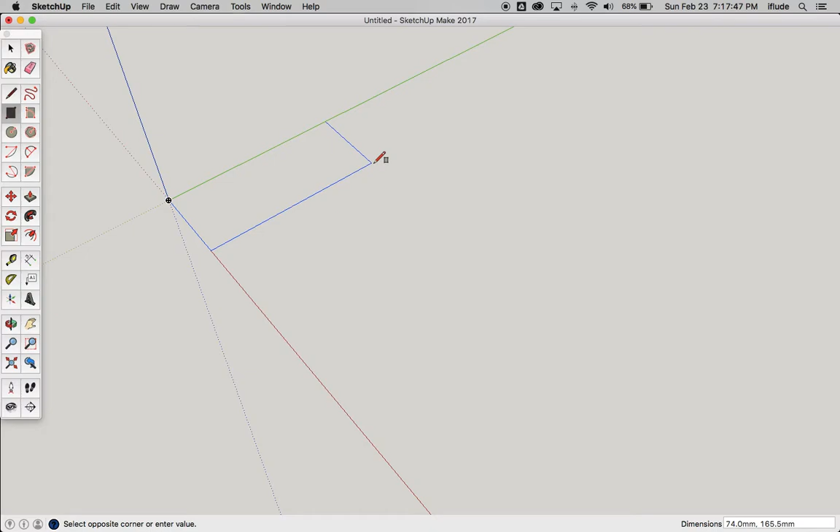So let's first do our rectangle, 700 by 1000. That can be our starting point. So 700, 1000, and now I need to zoom out a little bit so you can see what that looks like. Okay good, so let's go back.

Now you can see that from that same center point, level with this, you've got a dimension of 500 going up, so I'm going to draw a guideline there. Also these two legs are both 200 wide, so I'll do another guideline just there. You know you can take a guideline from any existing line, so just drag up from here, type 500, and I need one in 200 from here, and in 200 from here.

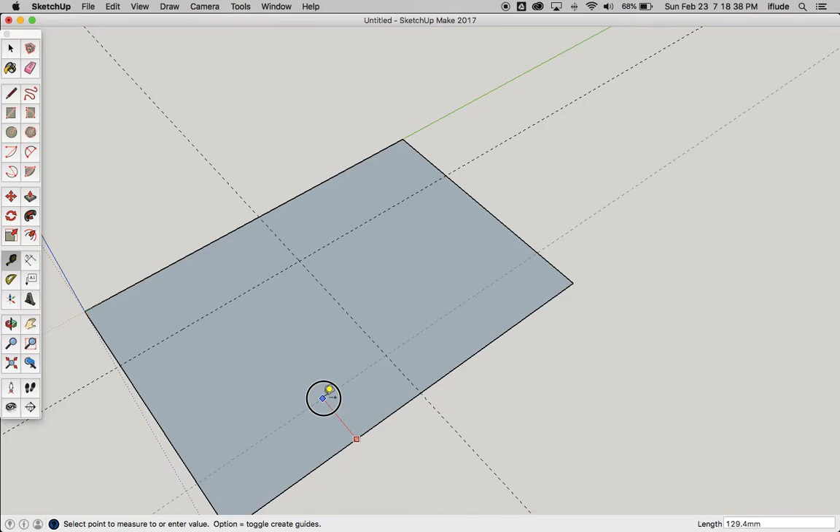Now what I'm doing here is building the basic shape before I add any radiuses. So what I can do is use my pencil tool to draw lines in using the guidelines as my guide.

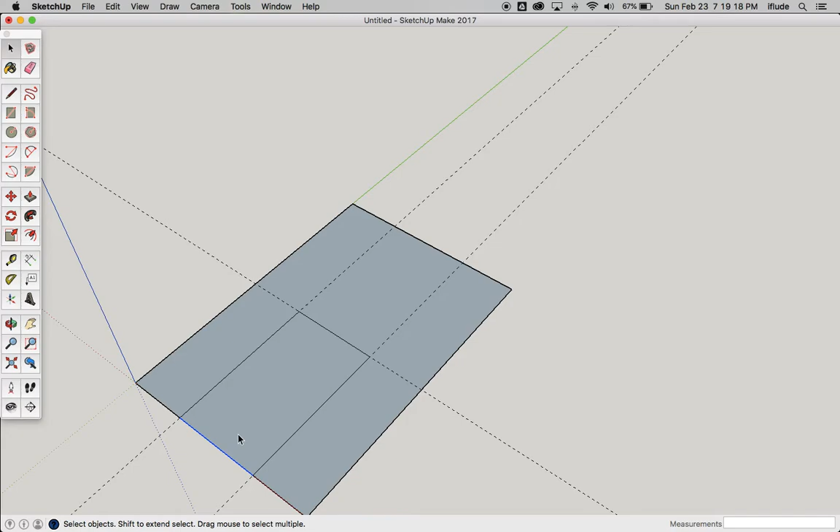If I've done that correctly, that should be two separate surfaces. A surface only occurs when you have a complete set of lines which join up in an enclosed shape. If I remove one of those lines, like deleting this line right here, the surface will also disappear. So if I hit delete, now I've selected that line, you can see I have the basic shape of what I need to draw in the booklet, except for the fact that I don't have any of these radiuses yet.

So let's start putting those in. Let's put radiuses of 300 on those corners.

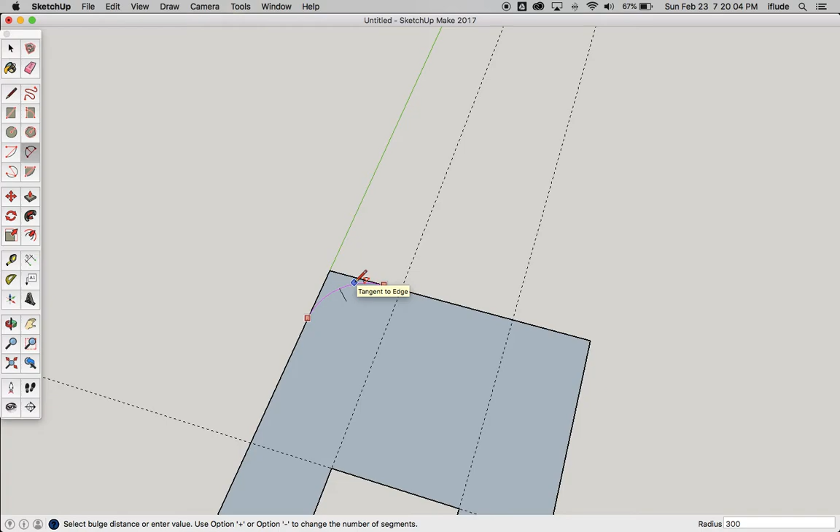2-point arc, click. Let's try that again. Get that to there, type 300. There's my first radius. I can go over here — I know that's the same, so I can just double click just here. There's my second radius.

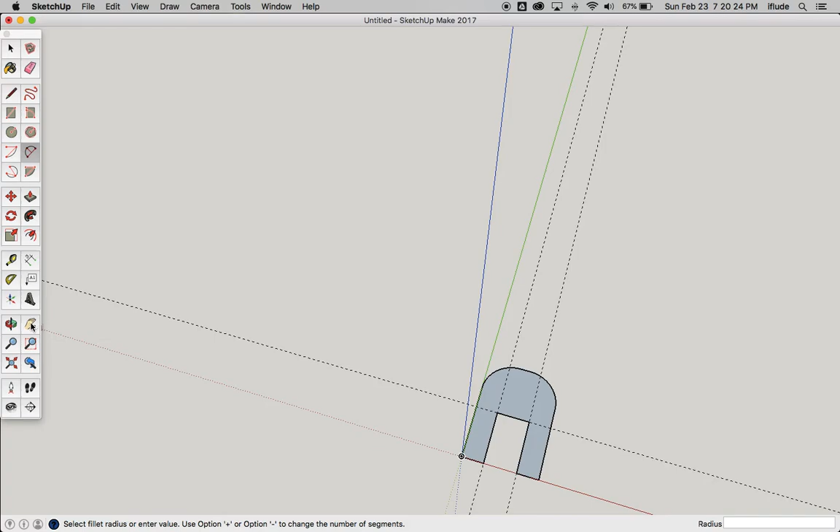And what else do I have? Now I have a radius of 100 on the ends of these feet, so I'll put that on now. Zoom in so we can work accurately, and move that view around a little bit.

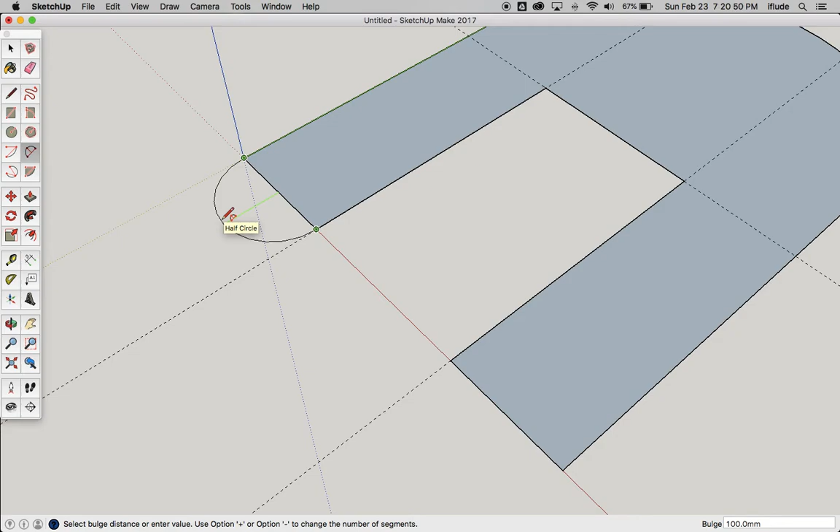Okay, so the 2-point arc actually has 3 points you have to define. So if you've watched any of the previous videos, you'll know that if I click twice and then drag out, at a certain point it snaps into place and becomes a half circle, and Sketchup conveniently tells me that it's a half circle. Now if I click, it gives me the half circle. Do the same thing over here.

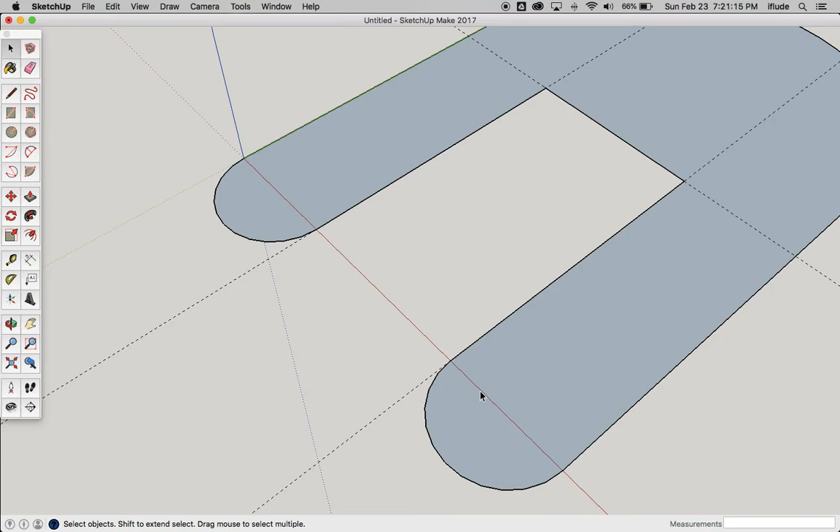And then in order to make it a complete shape, I need to remove these lines that divide my surface into two. Okay, so I'm now almost complete with my shape, except for the fact that I need to add some radiuses here on these inner corners.

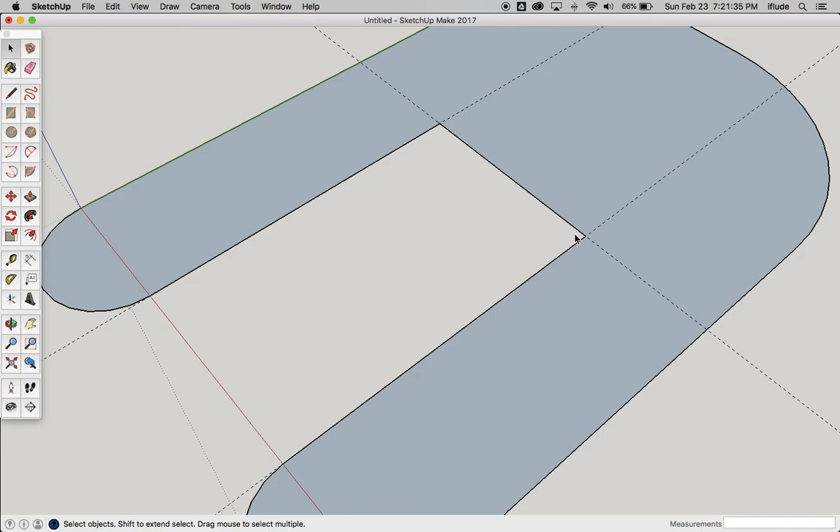Now the nice thing about Sketchup is what I just showed you regarding the 2-point arc also works on an internal corner, and it will fill in the surface which is missing. So for example here, if I click, drag out till it turns pink, move up the line until it turns pink again, type in my radius, which I think is 10. Let me just double check that — yeah, that's 10.

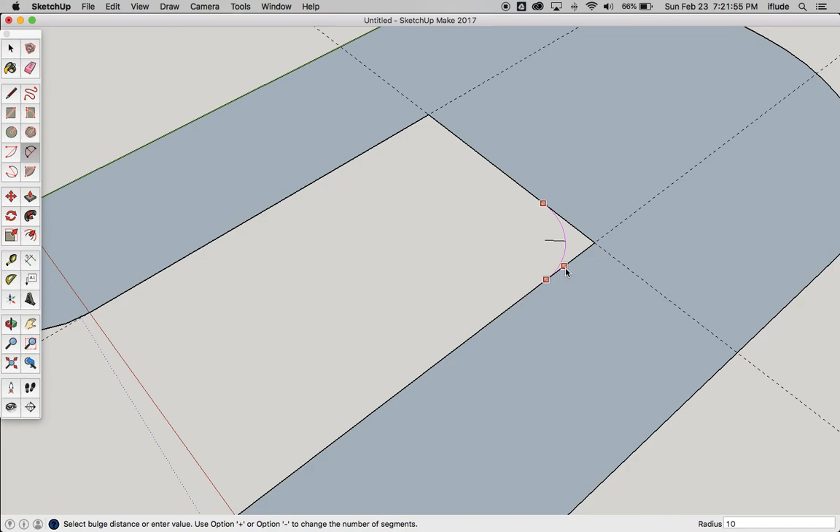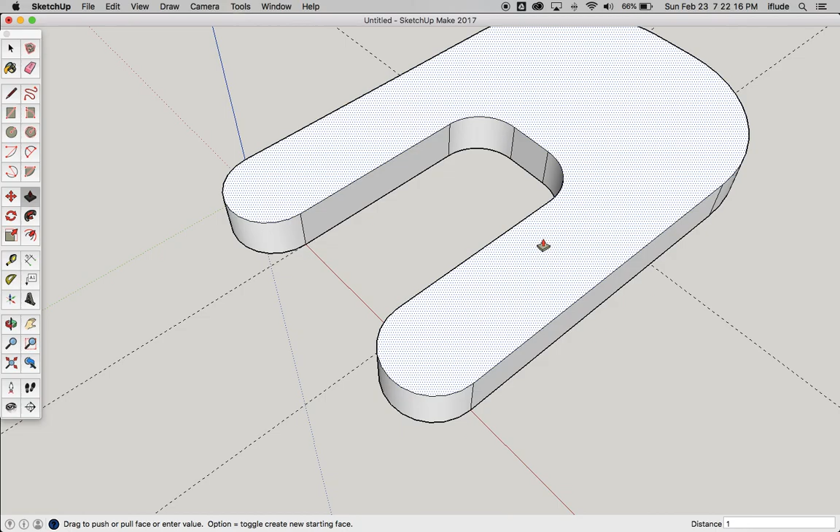And you can see now this area here is being filled in. If I do this, it'll do the same thing over here. Now there is my completed shape as it should look, and I have a thickness to add of 100, which I can do using the push-pull tool. And there, I again have a complete, finished, neatly drawn shape.